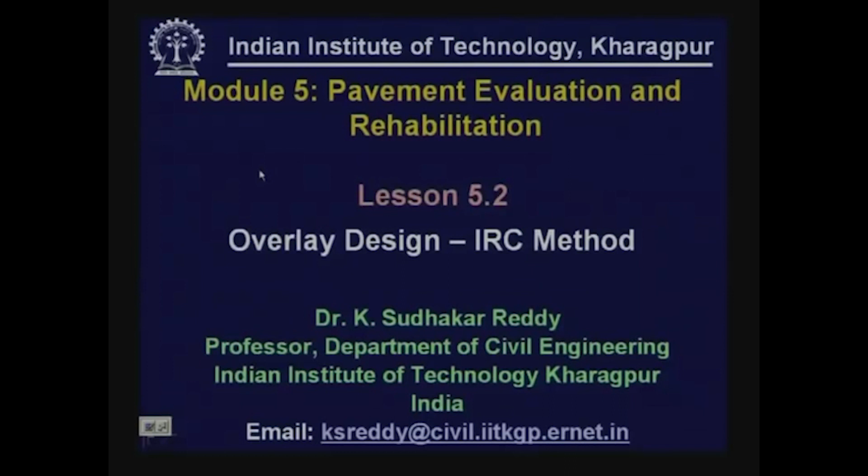In the previous lesson, 5.1, we discussed the need for rehabilitation and various techniques for functional and structural evaluation of pavements. In this lesson, we will discuss designing overlays for existing pavements using the Indian Roads Congress method, IRC 81, 1997 version.

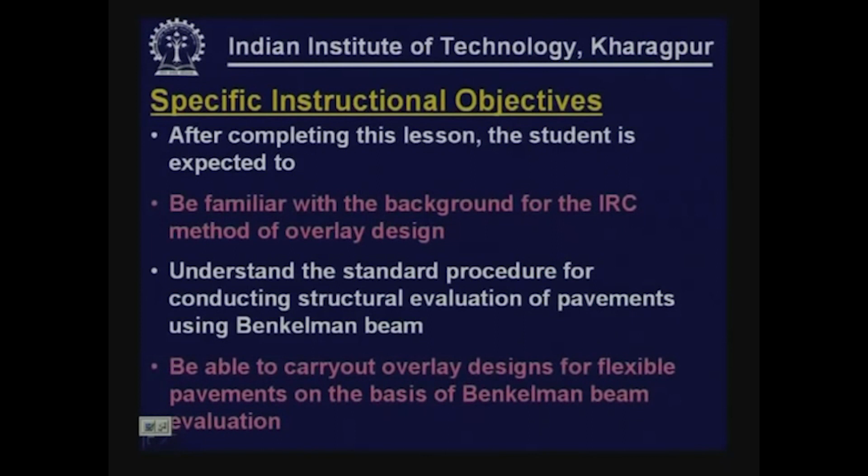The specific objectives of this lesson are: after completing it, the student should be familiar with the background for the IRC method of overlay design, understand the standard procedure for conducting structural evaluation of pavements using the Benkelman beam (since IRC 81, 1997 version is based on structural evaluation using the Benkelman beam technique), and be able to carry out overlay designs for flexible pavements on the basis of Benkelman beam evaluation.

We briefly discussed the need for evaluating pavements in the previous lesson, 5.1. We know that once constructed, pavements gradually deteriorate in terms of functionality and structural condition. The structural strength gets reduced, cracks form, there is deformation, and deterioration of materials in various forms, resulting in reduced structural soundness.

The functional performance also deteriorates because of surface distresses, so riding comfort, safety and other aspects important to road users are affected. Thus the functional performance gets reduced, and simultaneously the structural performance also gets reduced. We are concerned about both aspects.

So to improve the structural condition, what needs to be done, how to assess the requirement, how to assess the present condition - this is what we are going to discuss, based on the guidelines provided in the Indian Roads Congress guidelines.

As just mentioned, pavements deteriorate functionally and structurally with time. This is because of application of traffic loads and also due to the action of different climatic factors - action of moisture, action of temperature and other parameters.

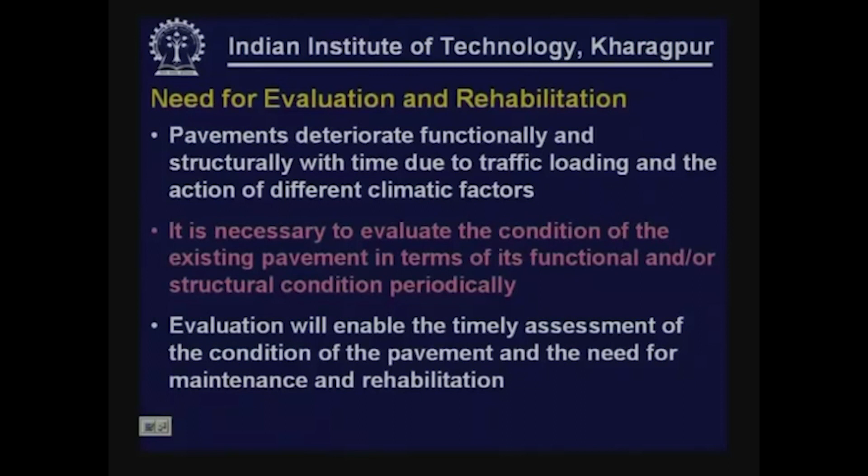The evaluation enables timely assessment of the condition of the pavement at any given point of time - what is its functional performance, what is its structural performance - and on that basis one can assess what is the requirement, if any, and what is to be done to improve the condition of the pavement.

Overlay is that reinforcing layer that we provide over an existing pavement. This is because pavements that do not have adequate structural strength to carry the projected future traffic have to be reinforced by providing an additional pavement layer.

Normally there will be situations where we are trying to assess a given facility in terms of its ability to carry traffic satisfactorily, to serve satisfactorily for the next 5, 10, or 15 years. So if we take into account all the traffic to be served over the design life period, say 10 years, we have to assess whether the existing pavement, in terms of its present structural strength, is capable of serving the projected traffic over the next 10 years satisfactorily.

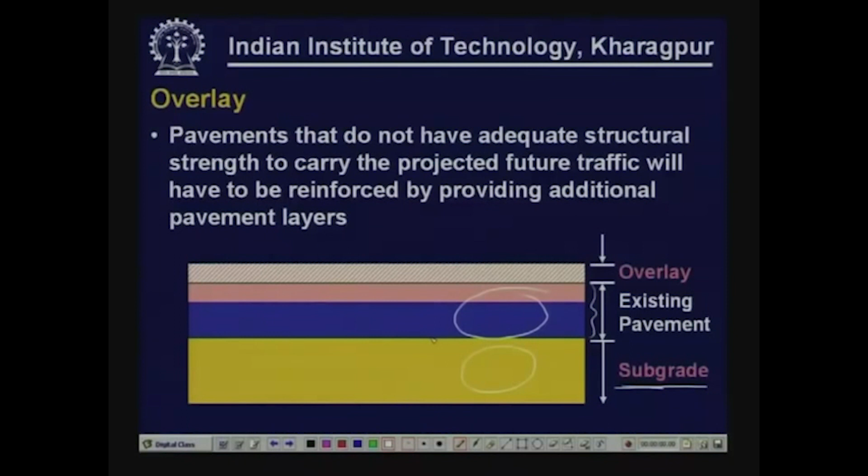The guidelines that we are going to discuss here are as per Indian Roads Congress 81, 1997 version. These are guidelines for strengthening of flexible road pavements using Benkelman beam deflection technique. This is the title of the guidelines: Guidelines for strengthening of flexible road pavements. We are referring to flexible roads, flexible pavements, and these guidelines are meant for Benkelman beam deflection technique. The first version was in 1981 and the first revision is what we are discussing, the 1997 revision.

These guidelines are based extensively on the findings of an MORTH, Ministry of Road Transport and Highways, Government of India, sponsored research project. It has got the code R6, which was entitled Development of Methods such as Benkelman Beam Deflection Method for Evaluation of Structural Capacity of Existing Pavements and also for strengthening of any weak pavement. This was the main objective of the research scheme.

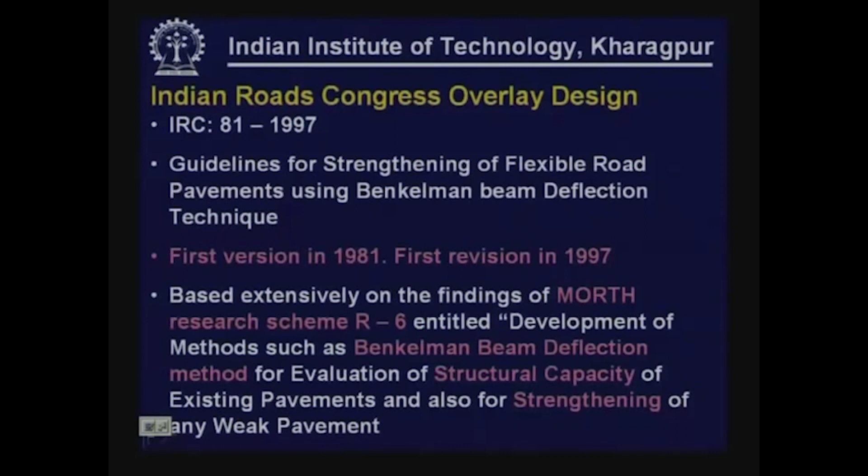It was to develop Benkelman beam and other related similar methods for evaluation of structural capacity of existing pavements. So, methodology for evaluation of structural capacity of in-service pavements and also for finding out the strengthening requirement of any weak pavements.

The scope of these guidelines is evaluation of the strengthening requirement of existing flexible road pavements using the Benkelman beam technique. So this is meant for flexible road pavements and is also meant for the Benkelman beam pavement evaluation technique.

The pavement performance is closely related to the elastic deflection. It is believed that pavement performance is closely related to the elastic deflection that the pavement undergoes when it is subject to a standard load.

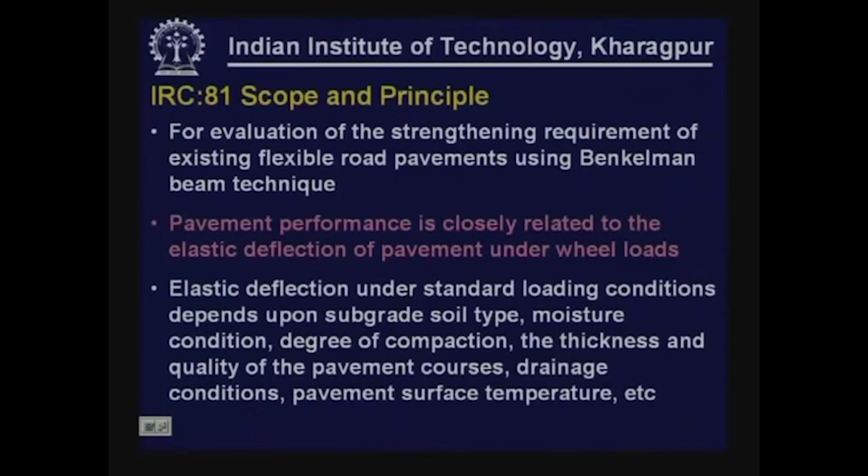Elastic deformation under standard loading conditions depends on various parameters such as the condition of the subgrade, its moisture content, degree of compaction, and the condition of various other layers including granular layers, bituminous layers, and also it depends upon various climatic conditions like temperature, provision of drainage, thickness of various layers, quality of different materials. So all the pavement-related parameters affect the elastic deformation of a pavement when it is subjected to wheel loads.

The Benkelman beam is a very simple apparatus and it is commonly used for measuring the surface deflection of a pavement under standard loading conditions.

The practical length of the beam that we are going to utilize is 2.44 plus 1.22, that is 3.66 meters.

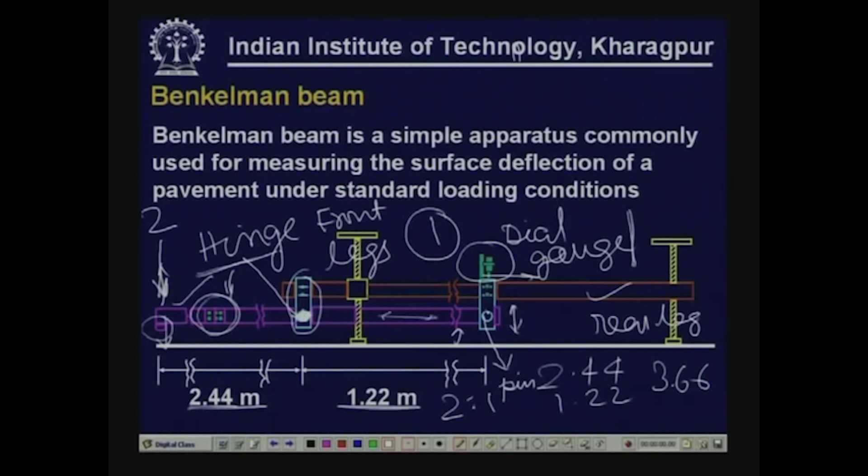So what we basically have here is 3 supporting legs, 1 supporting frame which supports the beam about this hinge point, and the beam will rotate about this hinge. So as the pavement goes up and down at the probe point, the corresponding end point will also move accordingly, which can be recorded using the dial gauge.

The principle is illustrated here. It is a very slender, very narrow beam, and total length, as I mentioned, is 3.66 meters. It is hinged at a distance of 2.44 meters from the probe end.

So initially, a load is applied here, and in its deflected condition the probe point of the beam rests on the pavement surface. This is the corresponding position of the end of the beam, which is rotating about this hinge. So this deflection can be observed using a dial gauge.

And when this load is removed, the pavement surface rebounds, and this would be the position of the beam corresponding to the rebounded portion of the pavement surface. So the end point will come down. This position will be recorded using the dial gauge. So the observed difference gives us an indication of the rebound deflection of the pavement.

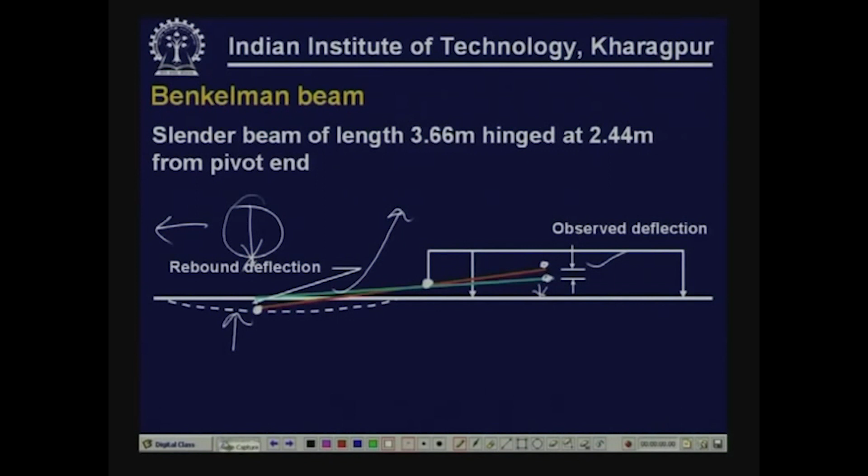Using a Benkelman beam for measuring the deflections, the load that is applied is either static or creep loading. As we just discussed, the Benkelman beam is an apparatus used for measuring the surface deflection of the pavement subjected to standard truck load. What is important here is we are using a load very similar to the load applied on actual pavement surfaces.

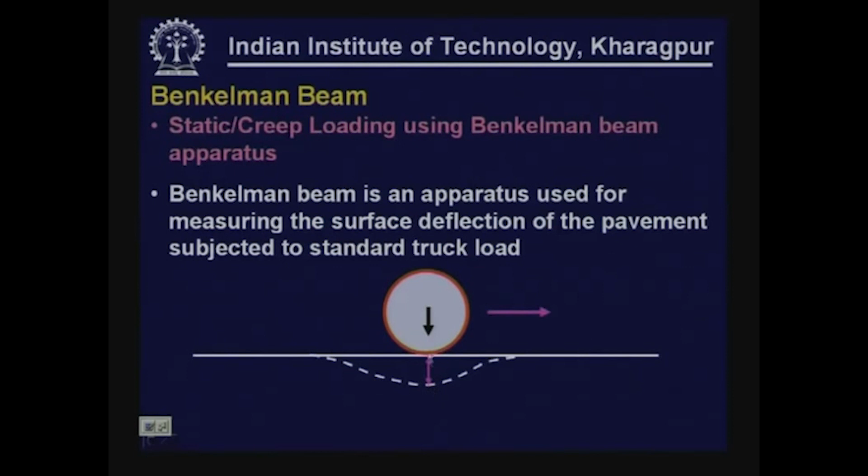Although we are standardizing the load, we are not applying any arbitrary magnitude of load that would be on the pavement surface. We standardize how much load has to be applied, but it is applied through a truck. So what we are going to measure is either the maximum deflection when the load is applied, or the maximum rebound deflection when the load is removed.

So maximum surface deflection is measured using the Benkelman beam in 2 different modes. As per the Western American State Highway Officials (WASHO) procedure, the deflection is noted as the wheel load approaches the point. The probe is kept on the pavement surface, the wheel load gradually approaches the point, and when the wheel load is directly above the point, we observe the maximum deflection. That is what is observed in the WASHO procedure.

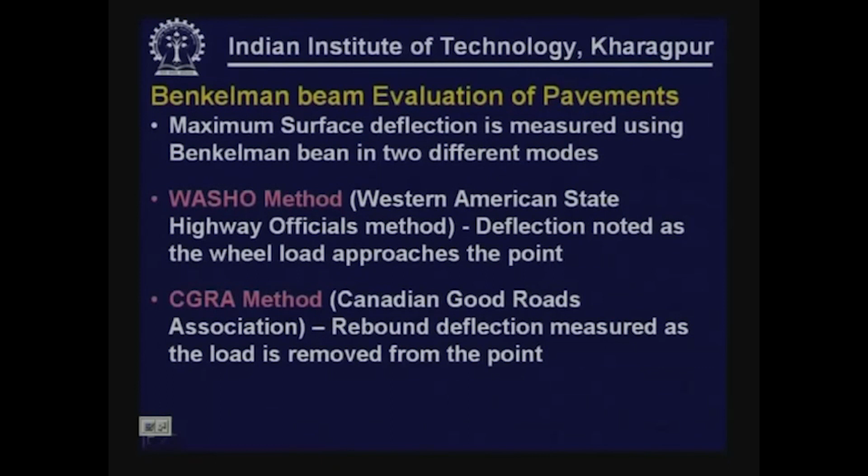But if you adopt the Canadian Good Roads Association (CGRA) procedure, the method of observing deflection is slightly different. Here we observe the rebound deflection, measured as the load is removed from the point. Initially the pavement is subjected to the load, and we note the reading corresponding to the deflected position. When the load is removed away from the point, the pavement rebounds, we take the reading again, and the difference gives us the rebound deflection. That is what we measure in the CGRA design evaluation procedure.

The WASHO method of measuring deflection using a Benkelman beam is depicted here. Initially the load is away, and the probe point of the beam is kept here, so we measure the corresponding deflection.

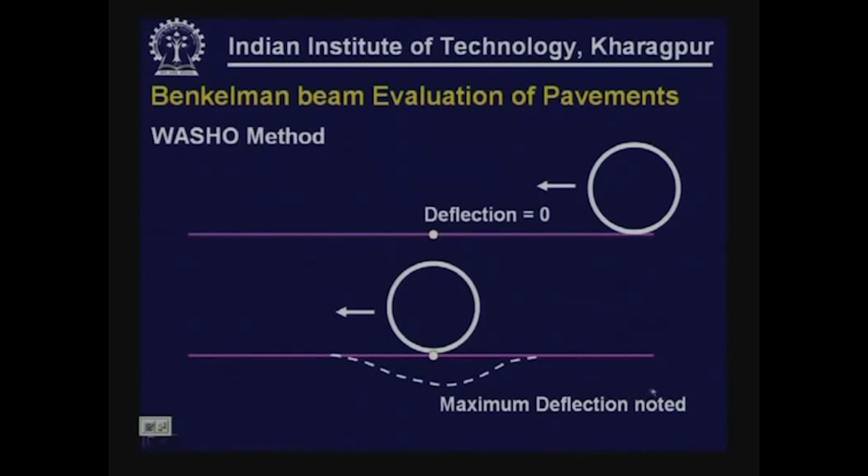As the wheel load gradually moves forward and is directly above the point, that is when we expect to get the maximum deflection. So we closely monitor the reading in the dial gauge, and when it is directly above the point, that is the deflection we note in the WASHO procedure.

On the other hand, in the CGRA procedure, initially the load is directly above the point at which we are trying to measure the deflection. So the probe point will be here, and the dial gauge reading corresponds to the position of the probe point corresponding to the deflected shape.

When this load is removed away from the point, the pavement surface rebounds, and the corresponding observation of the dial gauge is also made. So what we get here is the rebound deflection.

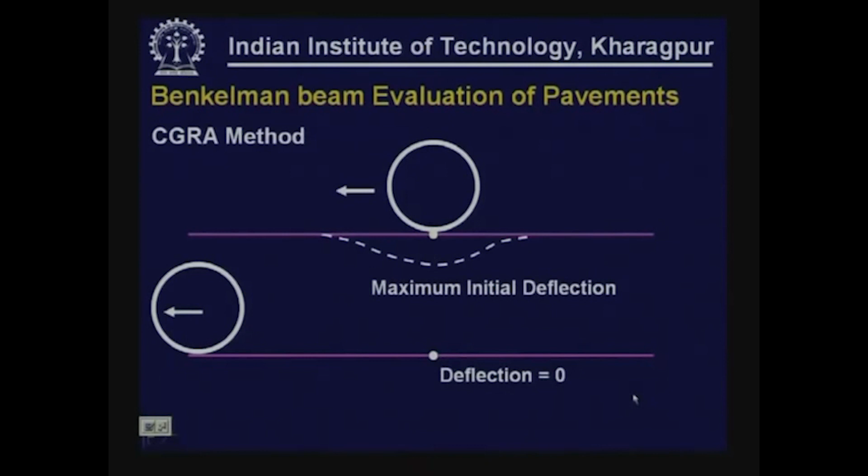Indian Roads Congress 81 guidelines suggest that we have to adopt the CGRA procedure. One can also adopt the WASHO procedure, but the criteria that we adopt has to correspond to the pavement evaluation technique that we are adopting.

If we are using the CGRA procedure, the corresponding criteria has to be there in terms of the deflection that we measure. If it is a WASHO procedure, the deflection measured can be slightly different, so the criteria also has to be different. So the criteria available for us is on the basis of CGRA evaluation of pavements.

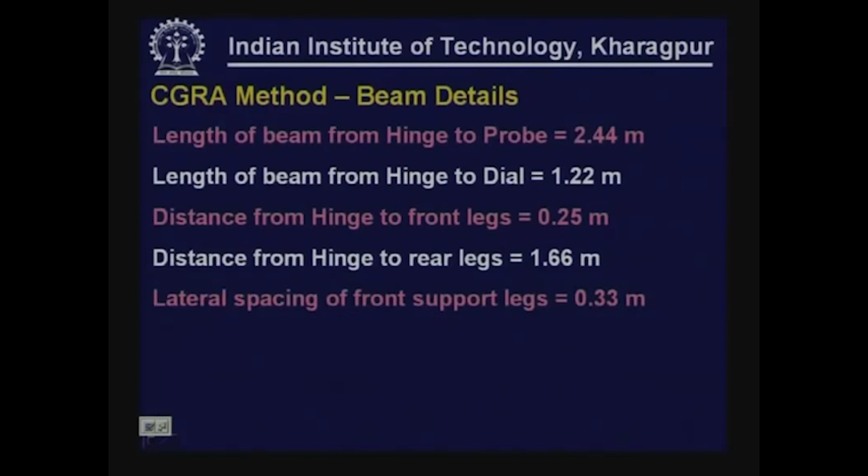The salient features of the beam are: the length of the beam from hinge to probe point is 2.44 meters, and from hinge to dial is 1.22 meters. The distance from the hinge to the front legs is 0.25 meters, and from the hinge to the rear legs is 1.66 meters. The lateral spacing of the front legs, the spacing between the two front legs, is about 0.33 meters.

The loading to be applied requires a 5-ton standard truck, used to apply the load. What is important is that the rear axle of this truck has to weigh 8170 kg. If you recollect, this is the load that corresponds to the standard axle load, 18,000 pounds, or approximately equal to 80 kilonewton rear axle.

This load has to be equally distributed over the two wheel sets. The standard truck will have two dual wheel sets on either side, so each of these dual wheel sets will have 8170 by 2 wheel load approximately. The clear spacing between these two tires in the dual wheel sets will have to be 30 to 40 millimeters.

Standard tires are to be used, 10 by 20, 12 ply. The tire pressure is again very important: 5.6 kg per centimeter square, or 80 psi tire pressure, has to be maintained.

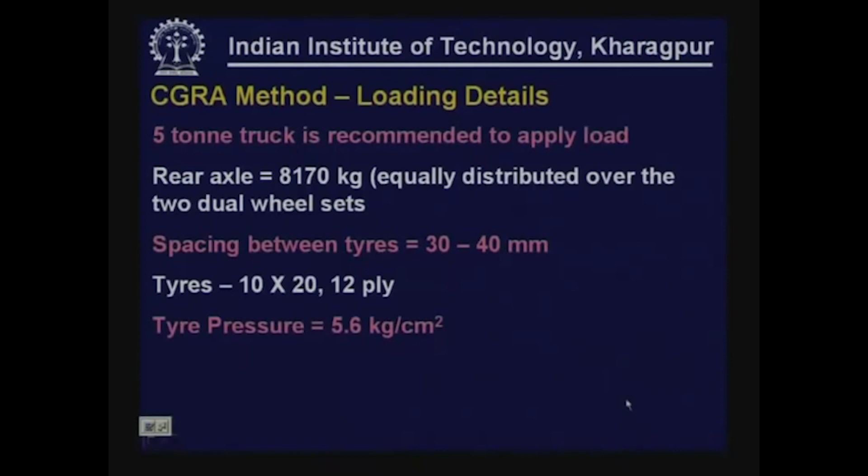The other accessories besides the Benkelman beam that we need are a gauge for measuring pressure, because the tire pressure is very important in the entire exercise. We have to keep monitoring the tire pressure, and if it deviates from 5.6, we have to adjust it.

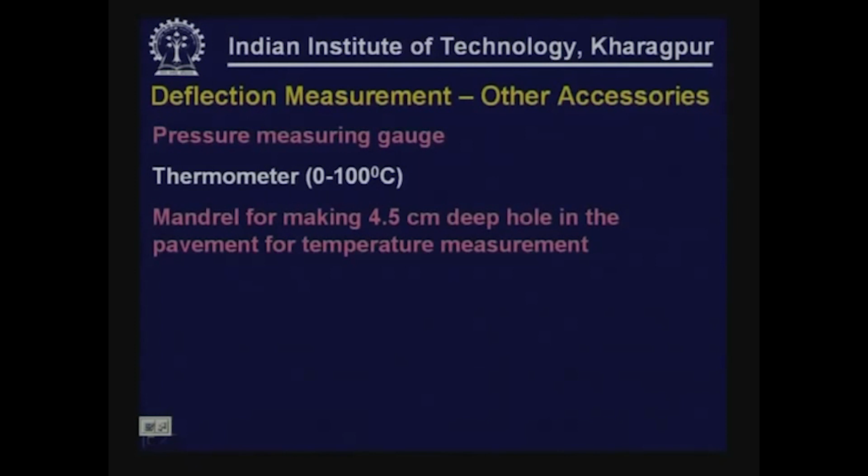We also need temperature measuring instruments, especially thermometers capable of measuring temperatures from 0 to 100 degrees centigrade, because we have to measure the pavement temperature. Deflections in bituminous surfacing get affected by the temperature of the pavement, so these deflections have to be standardized to correspond to a standard temperature. We should know the temperature at the time of measuring the deflections, and for that we need a thermometer.

We also need a small mandrel, using which we can drill a hole into the pavement, and into the hole we can put some glycerol, and then put the thermometer to measure the temperature. We have to put a small hole, 4.5 centimeters deep, in the pavement, add glycerol, and then place the thermometer there, so we are able to measure the temperature of the pavement periodically.

The procedure that has to be followed for measuring deflections using Benkelman beam is like this. First, we have to mark the point on the pavement surface. This has to be selected at a distance of 60 centimeters from the pavement edge, as per the guidelines given in IRC 81.

This is for single lane roads. So if we have a single lane road, we assume that the wheel path is approximately at a distance of 60 centimeters from the pavement edge. That is the path along which we are going to measure the deflections. So for single lane roads, the points will be selected at 60 centimeters from the pavement edge.

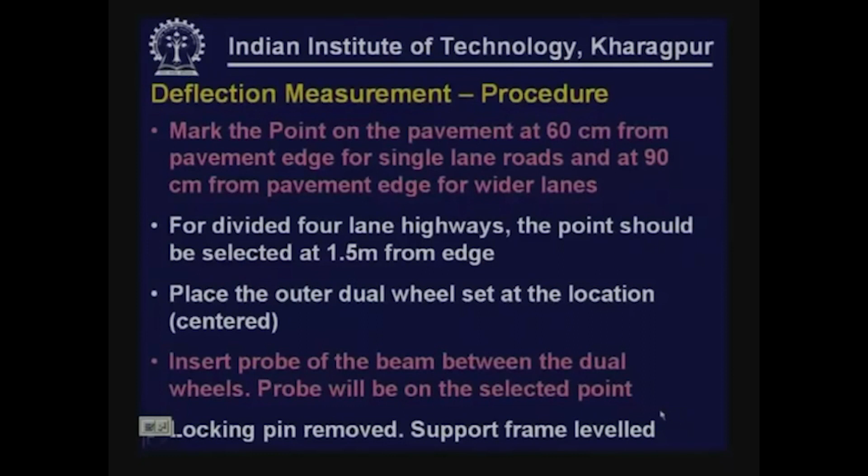This sketch shows how to select the location of the points for measuring the deflections from the pavement edge: 0.6 meters, 0.9 meters, 1.5 meters for different types of facilities.

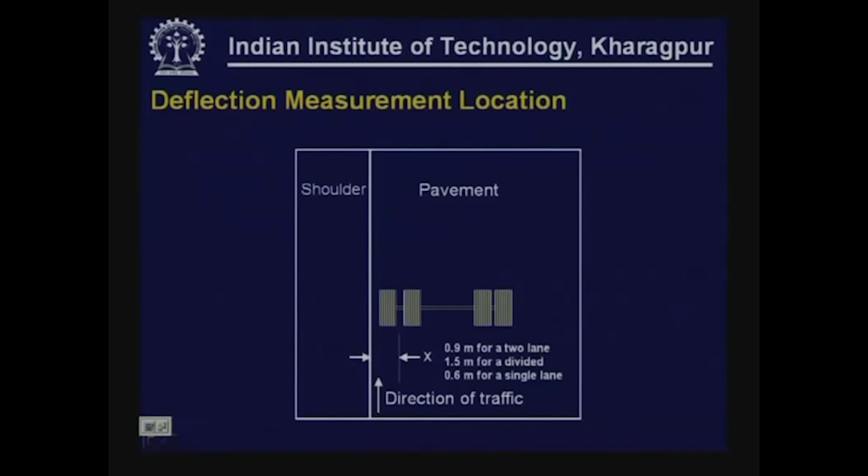The beam plunger has to be brought in contact with the stem of the dial gauge. The beam plunger is the arrangement we have at the end of the beam, above which the plunger of the dial gauge will be resting. So as the beam rotates in this direction, the plunger of the beam will be supporting the plunger of the dial gauge.

The initial reading in the dial gauge will be noted. As you understand, load is already placed on the point, the probe of the beam is placed between the wheel loads. So it is the initial deflected position, and the corresponding position of the end of the beam we are noting using a dial gauge, because the pavement is already loaded and has already taken a deflected shape. So the probe point is on the deflected shape, the end point goes up, and that is what we are observing using the dial gauge.

Then we move the truck forward to a distance of 2.7 meters from the initial point. Then we observe what is known as the intermediate reading in the dial gauge. As the wheel load moves away, the pavement rebounds, the end of the beam comes down, and that position will be noted by the dial gauge reading.

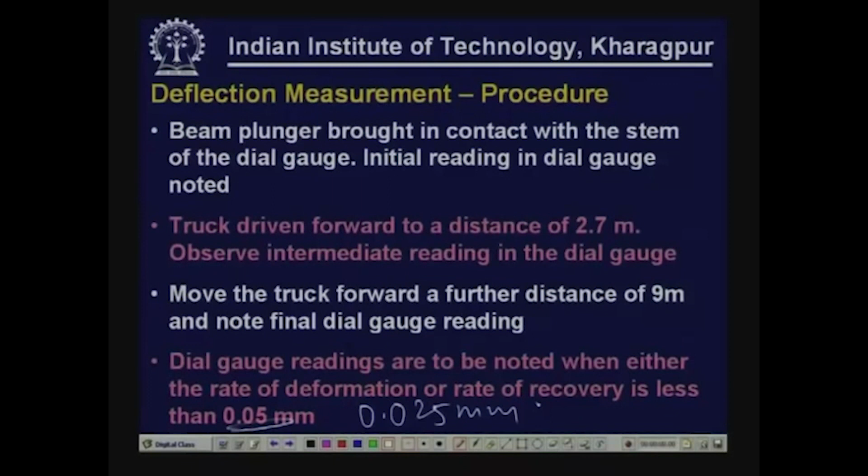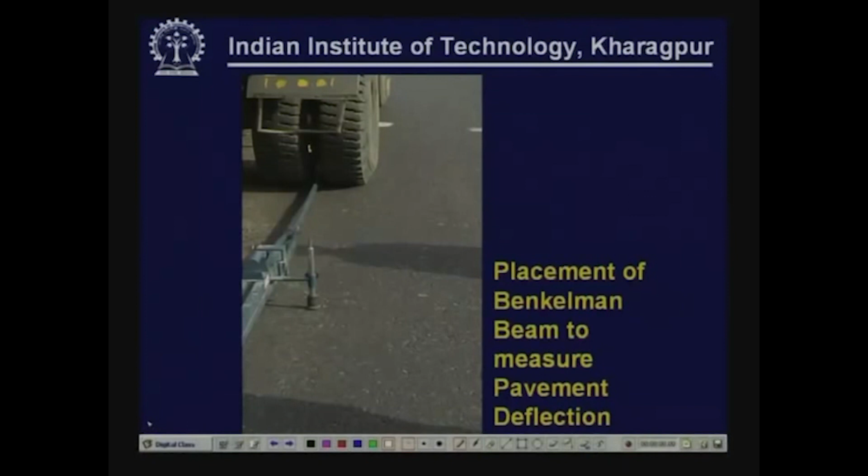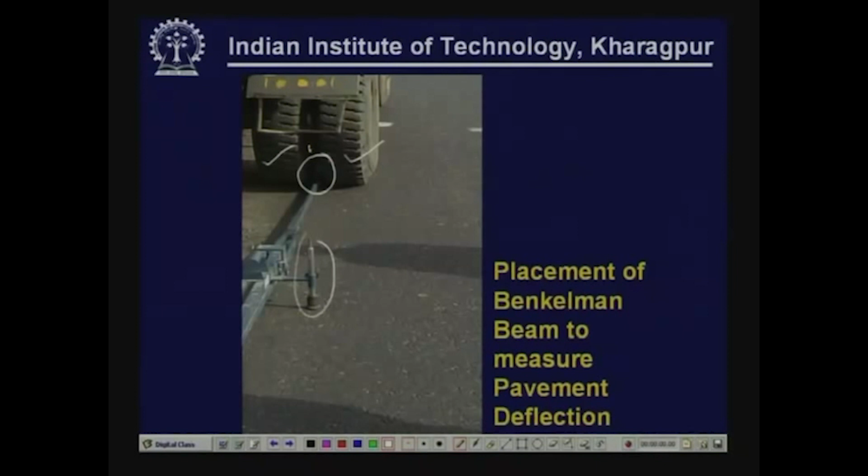The photograph here shows the dual wheel set of the outer wheel with the probe point of the beam placed between them; you may not see it clearly because it is under shadow. So the probe point of the beam is inserted between the two dual wheels, and these are the two front legs, the other leg you cannot see, and this is the extension arrangement that we have. This is the support frame of the beam.

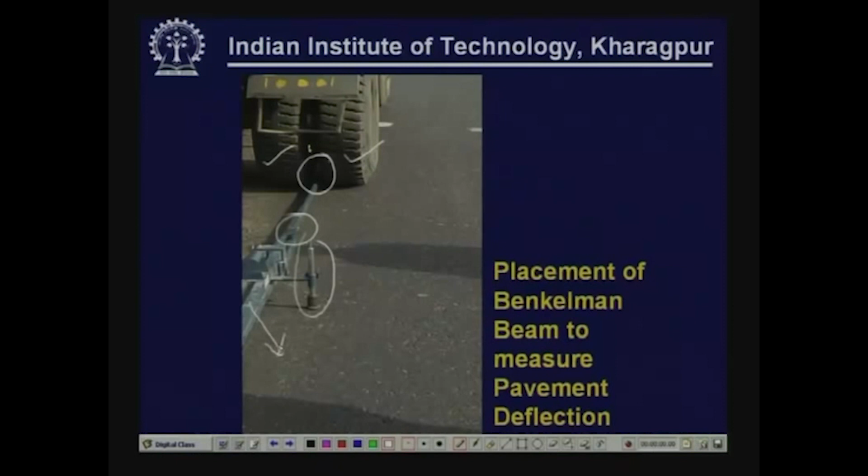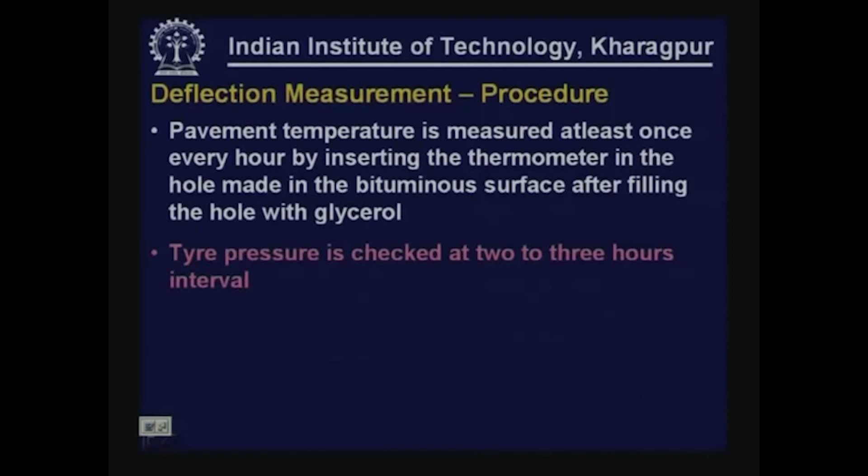While carrying out the deflection survey, we also have to measure the pavement temperature at least once every hour by inserting a thermometer in a hole made in the bituminous surface, filled with glycerol. Tire pressure is also checked at 2 to 3 hour intervals, and if it is not 5.6 kg per square centimeter, we adjust it.

When the load is moved to a distance of 2.7 meters, the pavement rebounds, though it may or may not fully rebound, and the corresponding intermediate reading is noted. In the final position, the load is moved a further 9 meters. Here, the probe point and pavement can be expected to fully rebound, and the corresponding dial gauge reading is noted as the final reading.

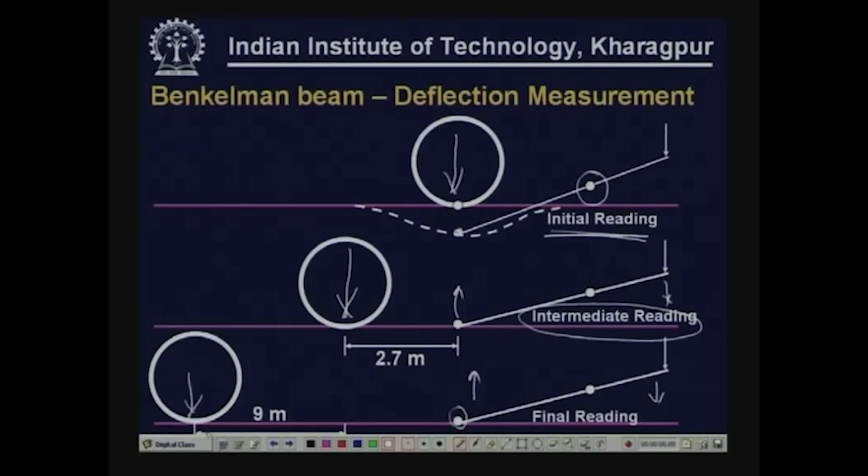For a given stretch of maybe 1, 2, or 10 kilometers, we make a number of deflection measurements. We don't just measure deflection at one point and design the overlay based on that. We select a sample of points to measure deflections at, and based on all these measurements, we work out a characteristic deflection representative of the entire pavement stretch, which we use for design and assessing the pavement's condition.

At a given point, to calculate the rebound deflection, we subtract the final reading from the intermediate reading, and also subtract the intermediate reading from the initial reading. If the difference between final and intermediate dial readings is less than 0.025 millimeters, this should normally be negligible, because when the load is moved to 2.7 meters the pavement should have fully recovered, and at a further 9 meters there should be no further rebound. That is the normal expectation.

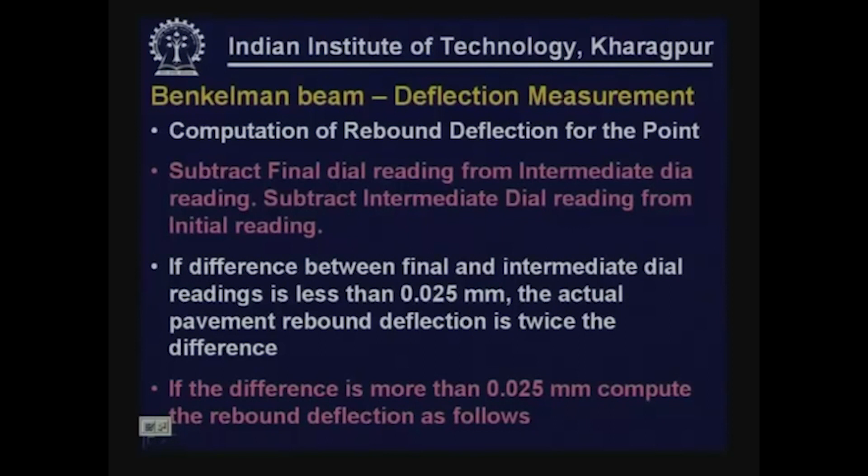Pavement rebound deflection, when intermediate and final readings differ by more than 0.025 millimeters, is given as twice the initial minus final reading, plus 2.91 times twice the difference between final and intermediate readings. If the difference is less than 0.025 millimeters, the pavement rebound deflection is equal to twice the final minus initial reading.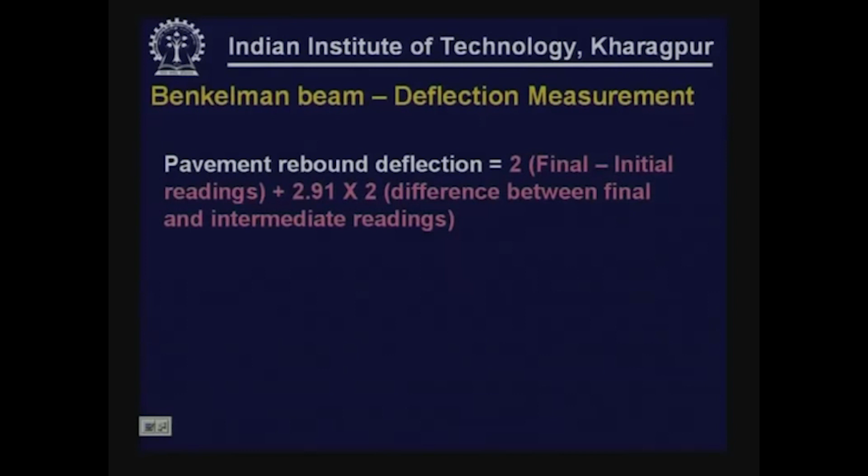We may conduct a Benkelman beam evaluation survey for say 100 kilometers, and we cannot give one single value representing the entire stretch. Instead, this stretch must be divided into smaller sections with uniform characteristics, perhaps 1, 2, or 3 kilometers each, uniform in terms of materials used, traffic pattern, subgrade condition, or especially the distress condition observed on the pavement surface.

So we first conduct visual examination and some physical measurements to determine the present distress condition. Based on that, we classify the pavement into different types of stretches, with each stretch handled differently.

For selecting homogeneous, uniform sections, pavements are classified as good, fair, or poor. Good means no cracking and rutting less than 10 millimeters average. Fair means no cracking or cracking confined to a single crack in the wheel track, with rutting between 10 to 20 millimeters. Poor means extensive cracking with rutting more than 20 millimeters. Sections with cracking exceeding 20% shall be treated as failed.

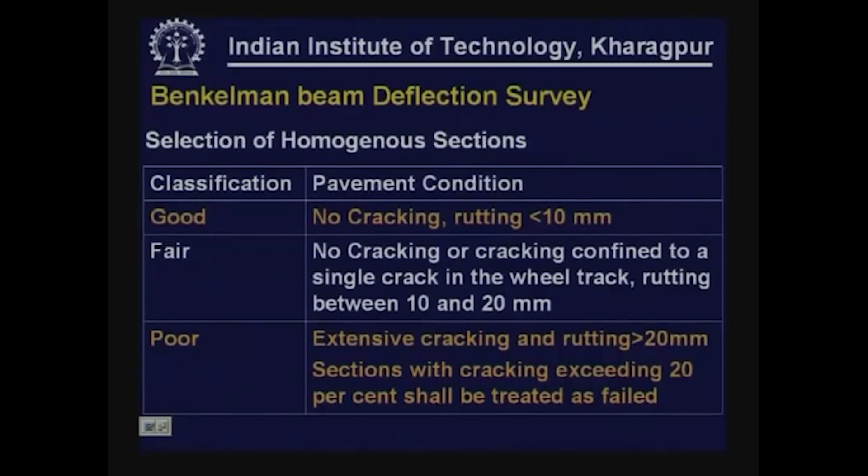So, we can classify the road in terms of the cracking, rutting and select homogeneous sections on this basis. On the basis of surface condition survey, the total stretch can be divided into uniform sections. Length of each section is to be kept to a minimum of at least 1 kilometer, because we do not want to design overlays for every 200 meters.

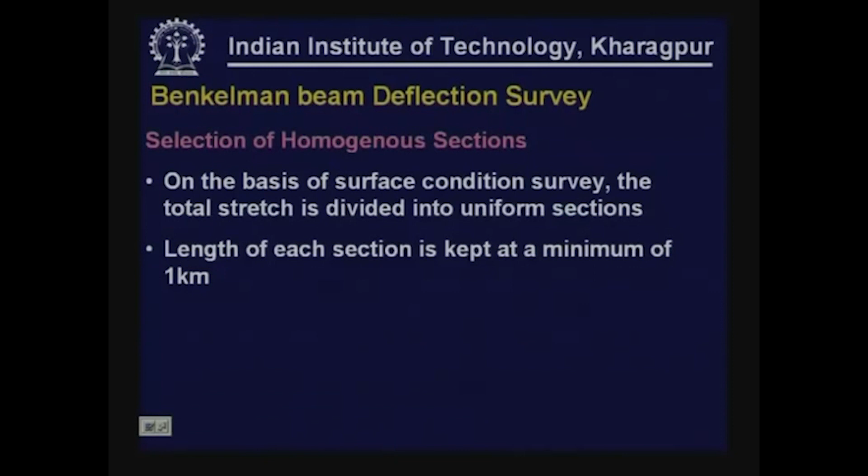For each homogeneous or uniform section of road, a minimum of 10 points should be selected at equal distance in each lane of traffic. The points to be selected along outer wheel paths. The interval between points should not be more than 50 meters. On roads with more than one lane, the points on the adjacent lanes can be staggered.

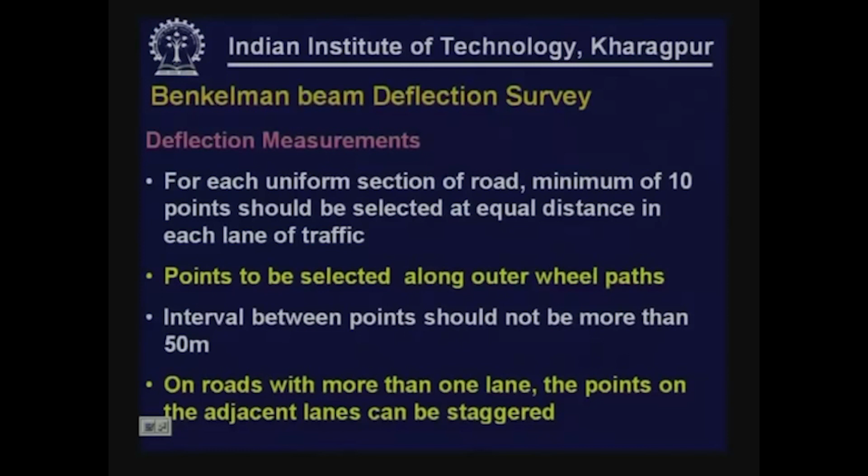In case of extreme deflection values, additional deflection measurements are to be made. For example, if the highest or lowest deflection differs from the mean by more than 1/3 of the mean, then extra deflection measurement should be made at 25 meters on either side of the point. We have to be careful about the extreme deflections, then make additional measurements if this criteria is satisfied. The measured deflections have to be corrected to correspond to a standard pavement temperature.

As I said, if you have a bitumen surfacing, the pavement deflections are going to be affected by the temperature of the pavement. At higher temperatures, the bitumen surface is going to be weak, then you get higher deflections. On the other hand, if you do the deflection survey in very cold temperature, the deflections will be low. So, this has to be normalized to a standard temperature.

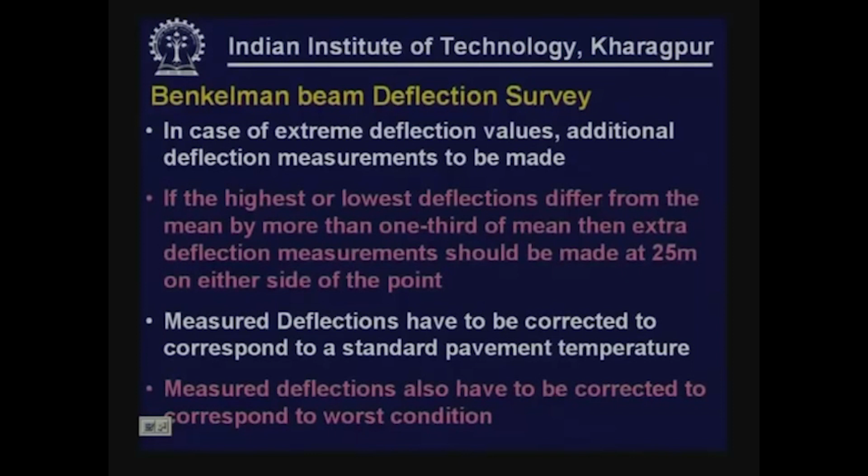The measured deflections also have to be corrected to correspond to the worst condition, because we are going to consider the structural condition of the pavement when it is in worst condition. This worst condition would normally be attained soon after monsoon. The correction for standard temperature has to be done for a temperature of 35 degree centigrade.

The guidelines are, the correction has to be 0.01 millimeter for each degree variation from 35 degree centigrade. For example, if the deflections are measured at 38 degree centigrade pavement temperature and the value is 0.8 millimeters, since the deflection is measured at a higher temperature than 35 degree centigrade, we have measured higher deflections, they have to be reduced to correspond to 35 degree centigrade. So, the corrected deflection will be 0.8 minus 3 into 0.01, that is the correction for each degree of difference in temperature, giving 0.77 millimeters.

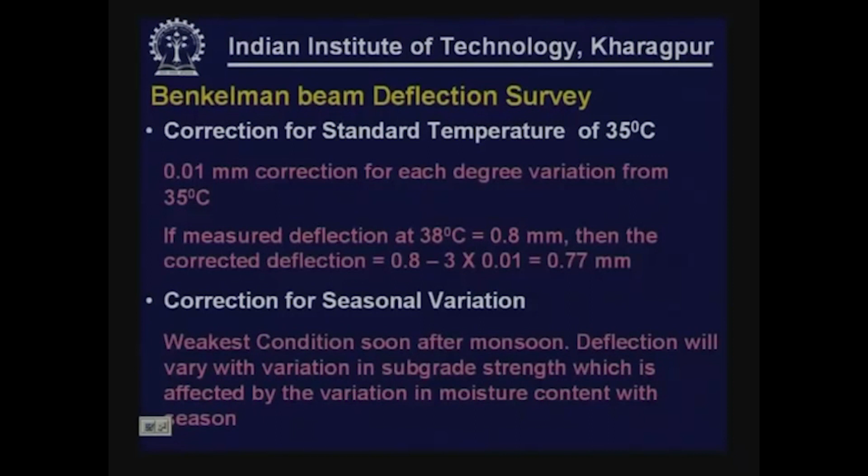Similarly, correction for seasonal variation also can be done. This has to be done for the weakest condition, which will be soon after monsoon. Deflection will vary with variation in subgrade strength, which is affected by the variation in moisture content with season, and also it is a function of the type of soil that is there.

For correction of seasonal variation, field moisture content of the subgrade soil sample has to be determined during the deflection survey. While conducting the deflection survey, we have to collect soil samples from the subgrade and determine the moisture condition. We also have to find out the type of soil. So, on the basis of the type of soil and the field moisture content, moisture correction factors or seasonal correction factors are given in the guidelines. These correction factors are available for different types of subgrade soils, different rainfall conditions, and different field moisture contents.

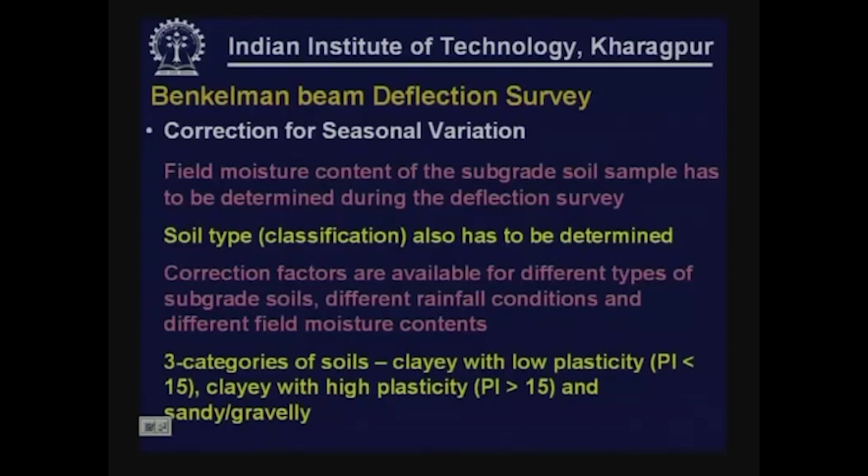Three categories of soils are considered: clay with low plasticity, PI less than 15; clay with high plasticity, PI greater than 15; and sandy gravelly soils.

The correction for seasonal variation can be obtained from the charts given in the guidelines, for a given field moisture content measured from the collected soil sample, a given soil type, and a given rainfall category. Two rainfall categories are considered: less than 1300 millimeter annual rainfall, and greater than 1300 millimeter annual rainfall. For either of these categories and for different types of soils, a series of charts are available. So, for a given soil type, rainfall category, and measured field moisture content, the moisture correction factor can be obtained.

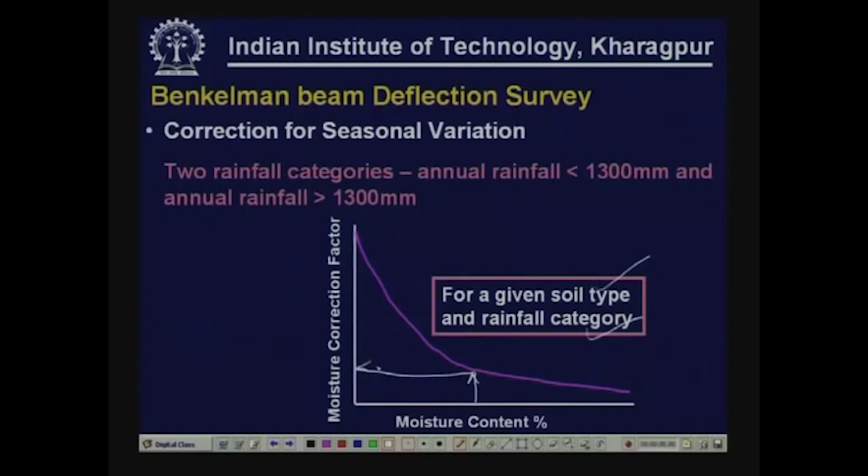On the basis of the number of deflections measured in a given stretch, a representative rebound deflection value for the length of the uniform stretch can be selected. This is known as characteristic deflection, which represents the overall condition of the pavement. It is obtained as the mean of all measured deflections plus some factor multiplied by the standard deviation. For major arterial roads like national highways and state highways, the characteristic deflection is mean plus 2 times standard deviation. For all other roads, it is mean plus 1 standard deviation.

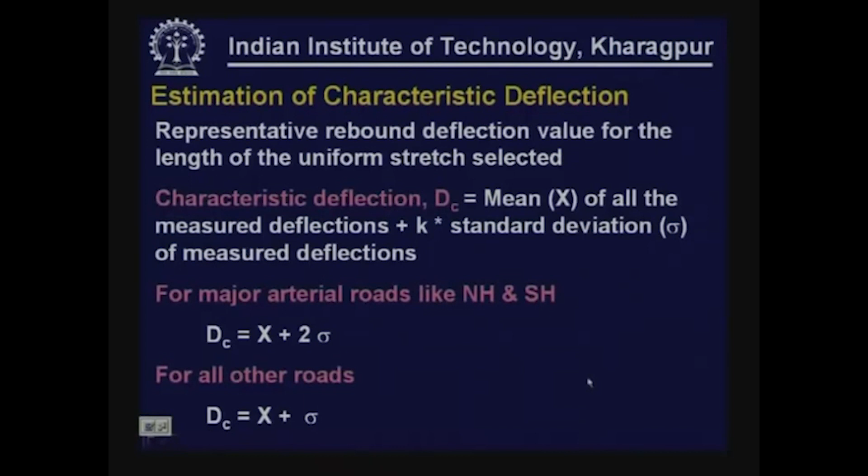For designing overlays, the following steps are to be followed. First, select the design period. Next, project the commercial traffic expected during the design period. If you select a design period of 10 years, then over the next 10 years after construction, we need to estimate how many standard axle load repetitions the pavement is expected to serve. We have to estimate the cumulative standard axle load repetitions for the design period.

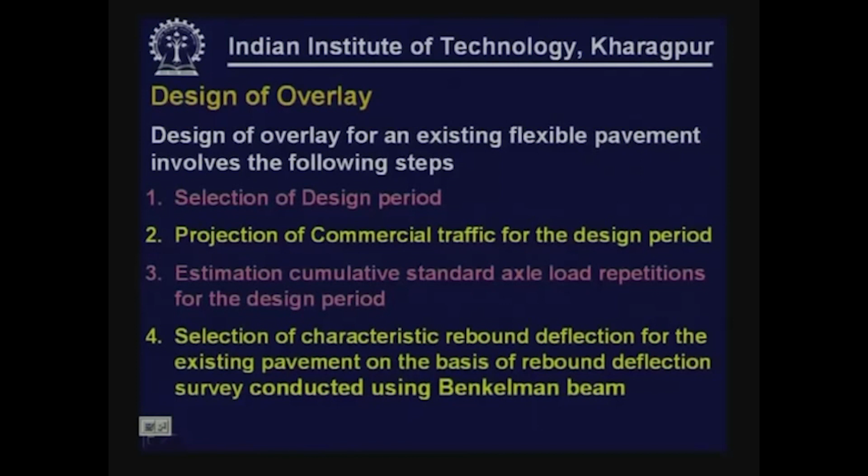We have to select the characteristic rebound deflection for the existing pavement based on the rebound deflection survey conducted using the Benkelman beam, as discussed so far: how to select a characteristic deflection, how to conduct the survey, how to get the sample deflections, and then how to calculate the characteristic deflection that is representative of the given stretch.

Traffic projection can be made in the following manner. Traffic A, the commercial vehicles per day at the time of completion of construction, can be obtained from the traffic count made some time back. P is the commercial vehicles per day at the last count, and r is the annual rate of increase of commercial vehicles. If more authentic information is available, we use that value; otherwise, IRC suggests using a value of 7.5%.

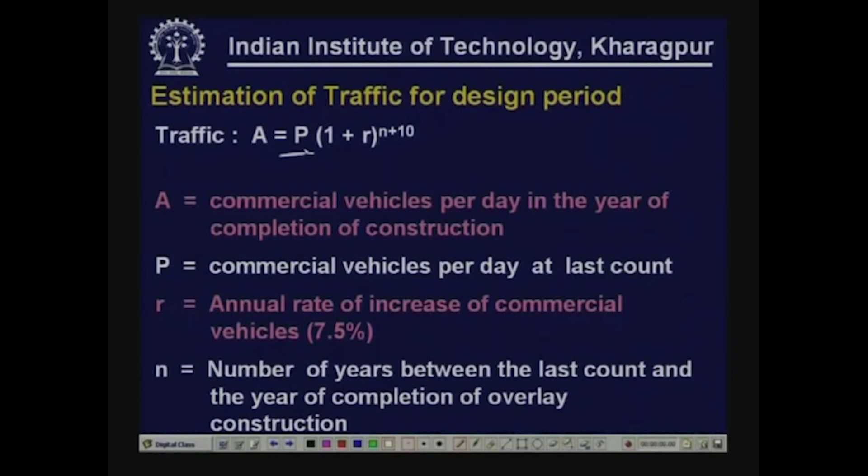n is the number of years between the last count and the completion of the overlay construction, since P might have been obtained 2 years back and the overlay may be constructed after another 3 years, so the elapsed time could be 5 years. The traffic intensity would vary by that time, so we estimate the A value based on the P obtained, let's say 5 years back, using this expression.

From the value of A estimated, N, the cumulative number of standard axles to be catered by the pavement during the design period, is given as N equal to 365 times A into (1 plus R) to the power x minus 1, into F divided by R. R is the annual rate of growth of commercial vehicles; authentic projections should be based on collected data, but if unavailable, a value of 7.5% can be taken. X is the design life in years, normally 10 for major roads and 5 for less important roads, and F is the vehicle damage factor.

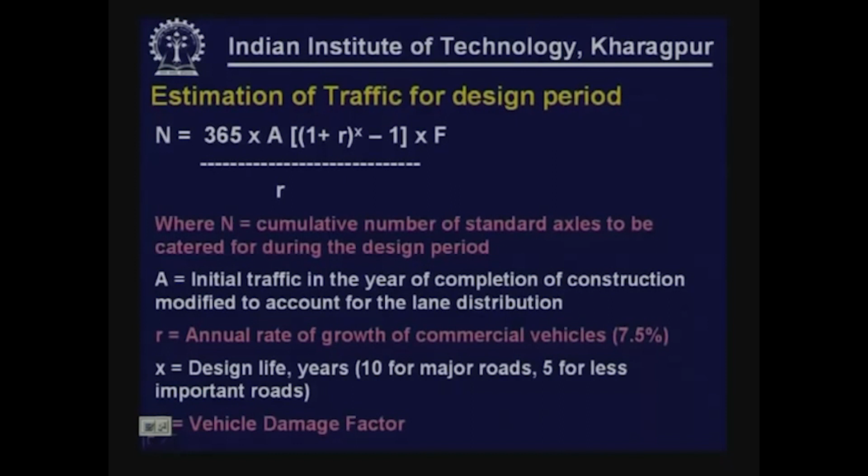The value of A has to be adjusted for lane distribution. For a single lane with a width of about 3.75 meters, the total two-way commercial traffic multiplied by 2 has to be taken. Though it does not appear very logical, this is the guideline given by IRC 81. If you recall IRC 37, for design of flexible pavement, revised subsequent to 1997, the lateral distribution factor for single lane roads there is 1, meaning we take 100% of the total two-way traffic. However, in IRC 81, the provision of multiplying the total two-way traffic by 2 still remains.

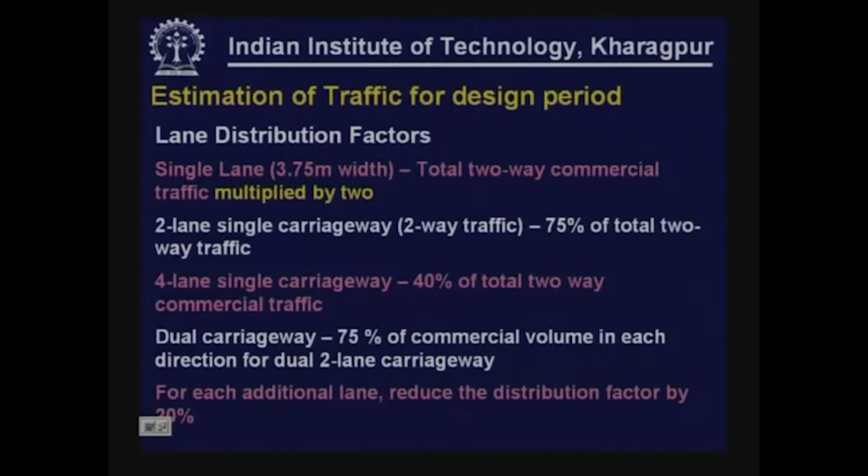For a 2-lane single carriageway with two-way traffic, we take 75% of the total two-way traffic. For a 4-lane single carriageway, 40% of total two-way commercial traffic is taken, since it is a single carriageway with no division between the two directions. We are interested only in commercial traffic. Similarly, for a dual carriageway, 75% of the commercial traffic in each direction is considered for a dual 2-lane carriageway. For each additional lane, reduce the distribution factor by 20%.

For estimating the traffic, we also need vehicle damage factors. We know that this has to be obtained from axle load survey, but if axle load survey data is not available, indicative VDF values are given for different commercial traffic intensities: 0 to 150 initial traffic.

We can select a value of 1.5 for rolling and plain terrain, 0.5 for hilly terrain, for 150 to 1500 commercial vehicles per day. 3.5 for rolling and plain terrain, 1.5 for hilly terrain. Similarly, if commercial traffic intensity is more than 1500, it's 4.5 for rolling and plain terrain, 2.5 for hilly terrain. So this is how we select the vehicle damage factor.

Thus we can estimate N, which is the cumulative standard axle load repetitions that the pavement has to cater to.

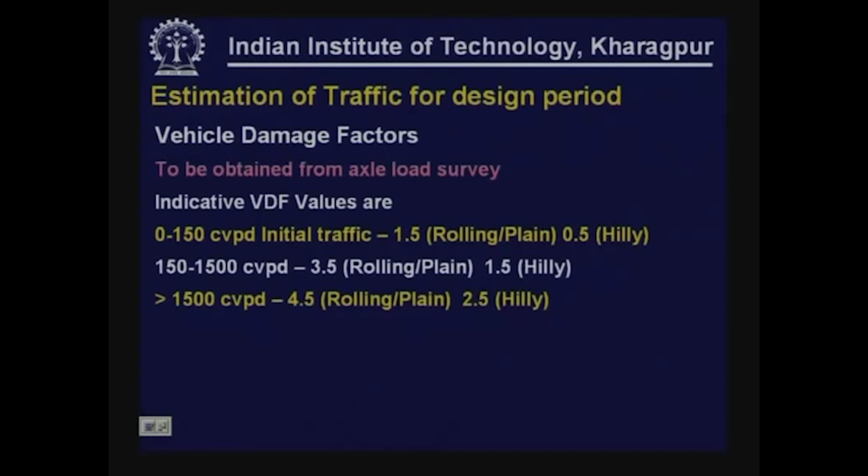IRC 81 has typical design charts using which we can select the overlay thickness. Characteristic deflection, depending upon the importance of the facility, mean plus 2 standard deviation or mean plus 1 standard deviation, that value has to be selected. On the basis of the characteristic deflection and design traffic, 20 million standard axles or 10 million standard axles, after estimating that, we get the thickness of the overlay to be provided.

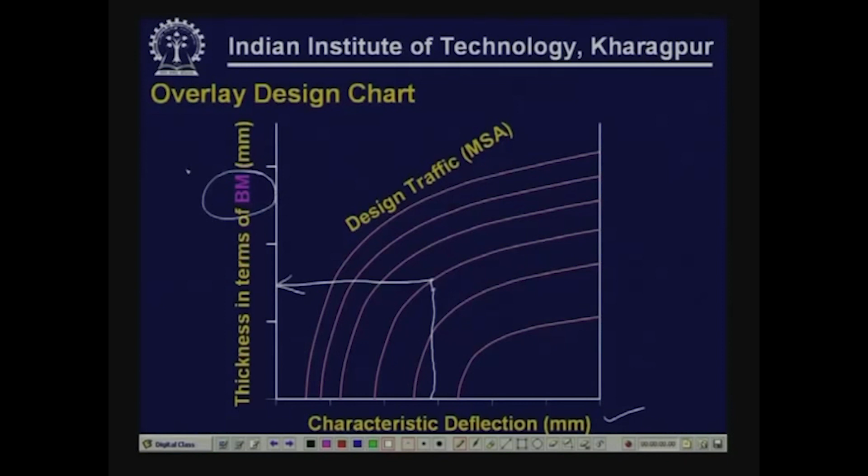This is in terms of bituminous macadam material in millimeters. This is quite simple. What we have to obtain is characteristic deflection from Benkelman beam survey conducted, corrected for temperature, corrected for season. So we select either mean plus 2 sigma or mean plus 1 sigma depending on the importance of the facility.

Obviously if you select mean plus 2 sigma, using the same chart we get higher bituminous macadam thickness. If you use mean plus sigma for lesser important roads, you get lesser characteristic deflection, and so naturally you get lesser overlay thickness.

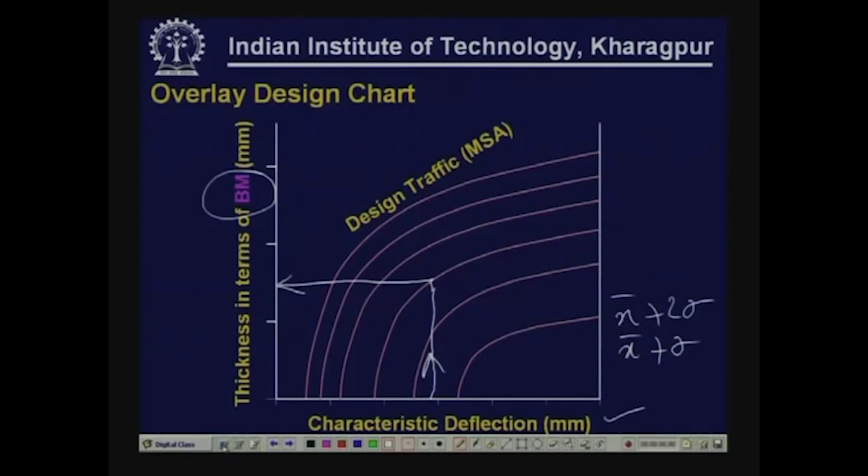So we have the overlay thickness in terms of bituminous macadam. We may not be using bituminous macadam, obviously it cannot be used for the surface. So this total BM requirement has to be replaced and provided in terms of DBM, BC, or other types of bituminous layers.

Using the conversion factors given here, we can convert the total requirement of BM into different component layers. For example, BM can be converted into other materials using equivalency factors: 1 BM is equal to 1.5 WBM or wet mix macadam or built-up spray grout layer.

If we are going to replace some requirement of BM in terms of WBM, WMM, or built-up spray grout, alternately if you are trying to replace BM in terms of DBM, AC or SDC (bituminous concrete or semi-dense concrete), the equivalency is 1 BM is equal to 0.7 DBM, AC or SDC.

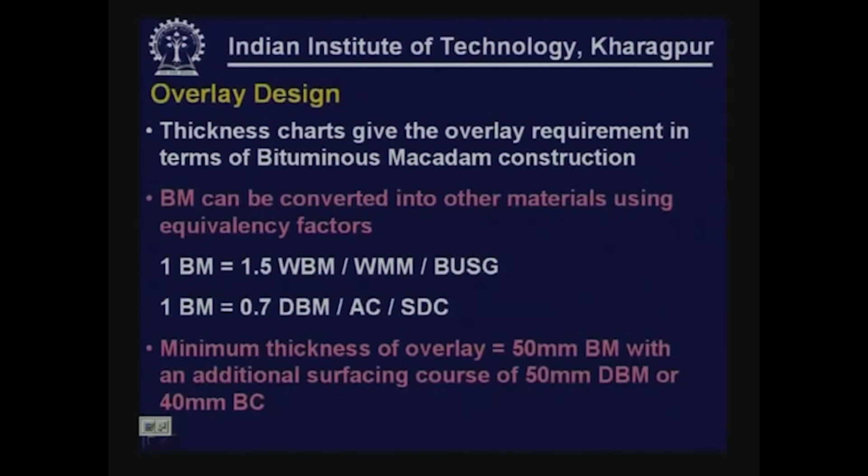Minimum thickness of overlay that has to be provided, irrespective of all the calculations that we get, is 50 millimeters BM with an additional surfacing course of 50 DBM or 40 BC.

Let us take an example. The data available: subgrade is sandy soil, moisture content measured during the deflection survey was 8%, and the pavement temperature was observed to be 35 degrees centigrade.

We remember 35 is the standard temperature to which we have to adjust all pavement measured deflections. So incidentally the temperature itself is 35 degrees centigrade, so we will not be making any correction for pavement temperature.

The area has an annual rainfall less than 1300 millimeters. The existing traffic is 5000 commercial vehicles per day. Design period has to be 10 years. Traffic growth rate is assumed to be 7%. Vehicle damage factor on the basis of axle load survey is found to be 4.5. We have to design an overlay for this pavement, which is a national highway.

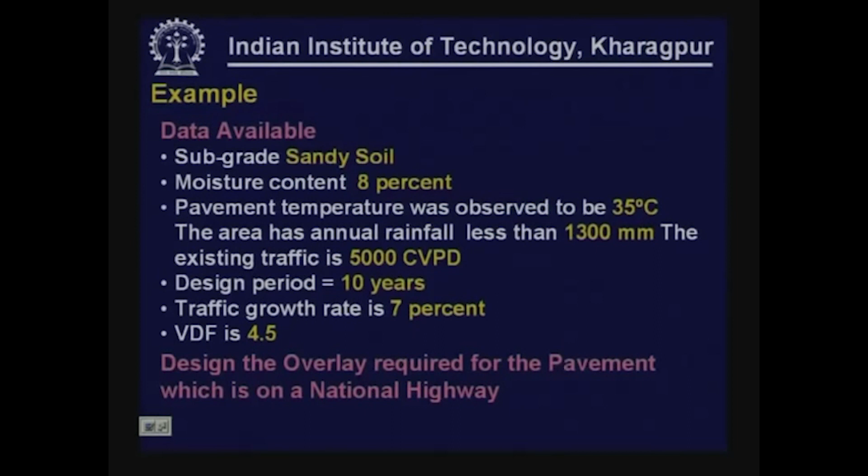This is a typical deflection data that was measured: initial deflection, intermediate deflection, and this is how we calculate the mean and standard deviation. This is the mean value, this is the standard deviation value. From this is how we get the characteristic deflection as mean plus 2 sigma.

We are not making a correction for temperature, but we are making correction for moisture. This is the correction factor that is obtained.

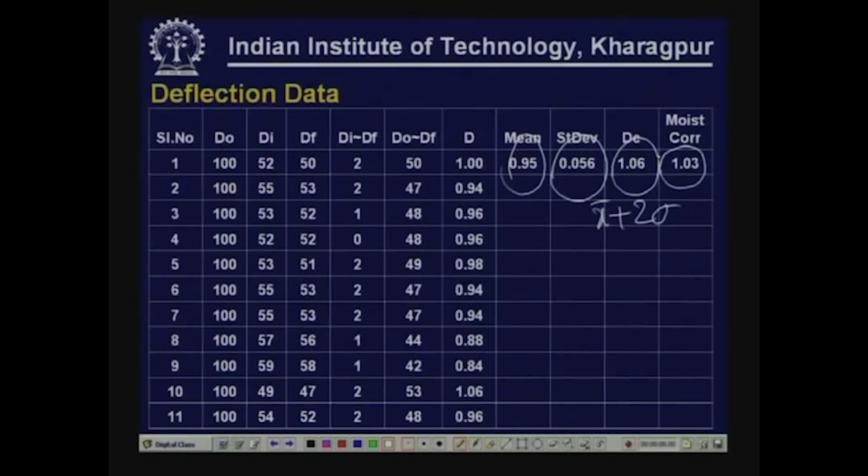The characteristic deflection works out to be 1.06. This corrected for temperature has no correction, and corrected for moisture or season the correction factor is 1.03. So the corrected deflection is 1.09.

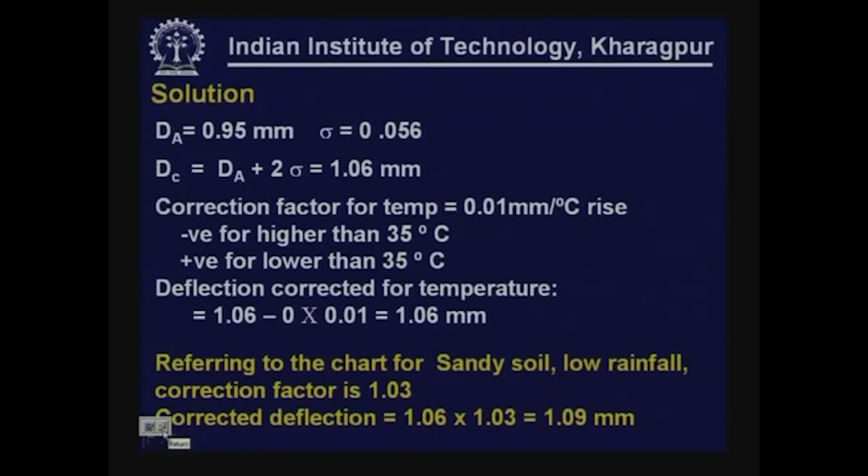So, we can verify whether this is correct or not. BM is bituminous macadam and BC is bituminous concrete.

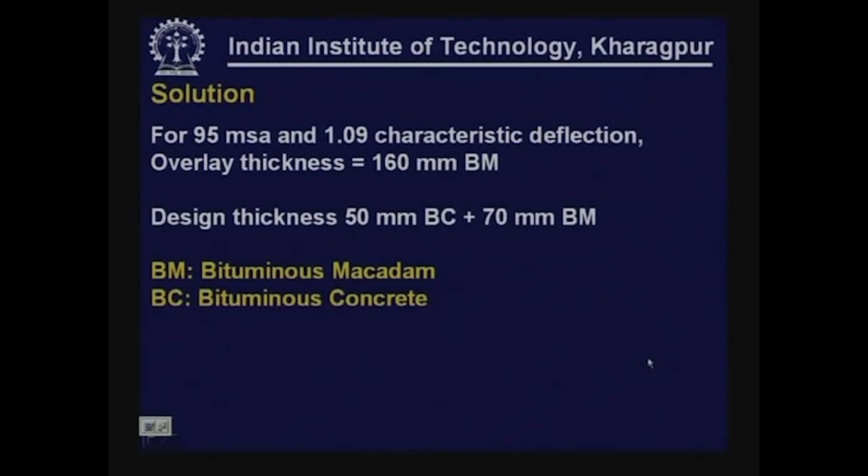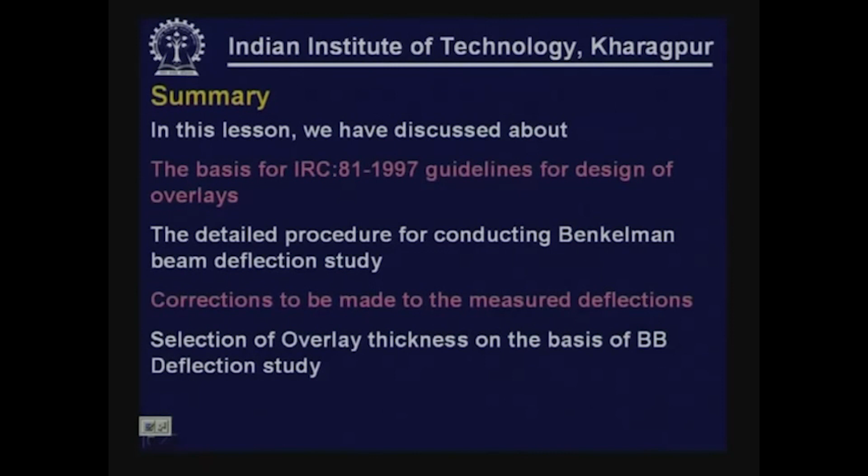To summarize, in this lesson we have discussed the basis for IRC 81/1997 guidelines for design of overlays. We also discussed the detailed procedure for conducting Benkelman beam deflection survey, and the corrections to be made to the measured deflections in terms of temperature correction and seasonal correction. We also discussed how to select overlay thickness on the basis of Benkelman beam deflection study and other information collected during the survey.

Let us take the answers to the questions that we asked from lesson 5.1. Lesson 5.1 was on evaluation of pavements.

What are RTR-MMS? RTR-MMS are response type roughness measuring machines. These are equipment that give an index of roughness of the pavement, and this index is sensitive to the road user's perspective.

Compare Merlin with fifth wheel bump integrator. Merlin and fifth wheel bump integrator are entirely two different equipment. Fifth wheel bump integrator is a response type equipment which has got a suspension system, and what we measure there is the cumulative stroke of the suspension system. In the case of Merlin, what we measure is how the midpoint of a straight line drawn between two points on the pavement surface varies, and how that variation is distributed.

So, while the roughness parameter obtained using a fifth wheel bump integrator can vary over time and be different for different equipment, Merlin is more or less standard. That is why it is normally used to calibrate response type equipments.

Why is it necessary to calibrate RTR-MMS? Response type equipment's response will vary with time, and similarly for a given road, if you use different types of RTR-MMS, you get different roughness values. That is why these have to be standardized to correspond to a standard index, so we have to calibrate RTR-MMS.

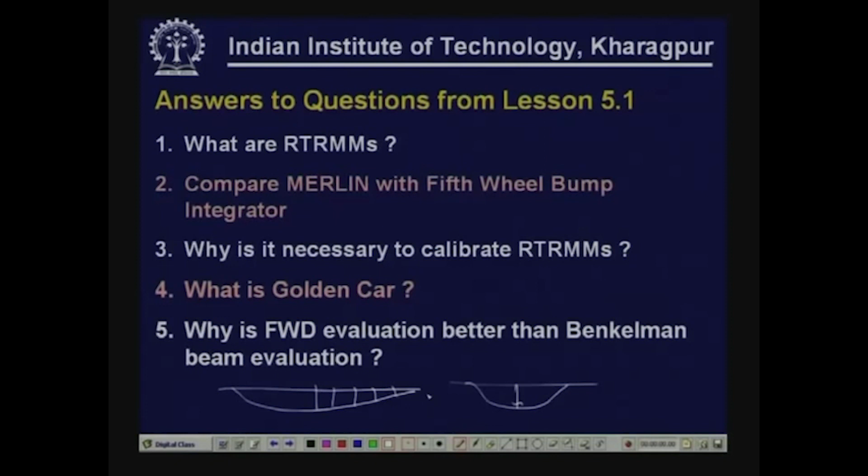Why is FWD evaluation better than Benkelman beam evaluation? In FWD evaluation, we get information about the deflection bowl of the pavement, whereas in the case of Benkelman beam we get only one deflection, which is the maximum deflection. In FWD we get a number of deflections, so we get more information about the pavement compared to Benkelman beam evaluation. Therefore, FWD is always better than BB evaluation.

We will have a few questions from this lesson.

Why do we multiply the deflection obtained from the dial gauge readings by 2? This is because the beam is hinged about a location which has got a 2:1 ratio in terms of length, so that is the reason why we multiply the deflections obtained from the dial gauge by 2.

What are the corrections to be applied to the surface deflections measured using Benkelman beam? We have to apply temperature correction so that it corresponds to a standard temperature of 35 degrees centigrade. We also have to apply seasonal correction on the basis of the moisture content obtained, so that the deflection corresponds to the worst condition.

What is the load applied to the pavement for measuring surface deflections in the Benkelman beam procedure? The load applied is through a truck. The rear axle has to be 8170 kg equally distributed on both the dual wheel sets, and the tire pressure has to be 0.56 MPa.